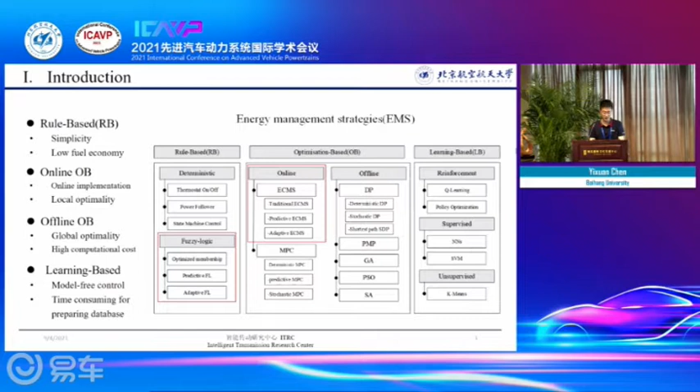EMS can be divided into 3 categories according to the method of algorithm implementation, such as the rule-based EMS, optimization-based EMS, and learning-based EMS. Each EMS has advantages and disadvantages. Considering the real-time requirements of the vehicle controller, the research of this paper is based on fuzzy control and ECMS.

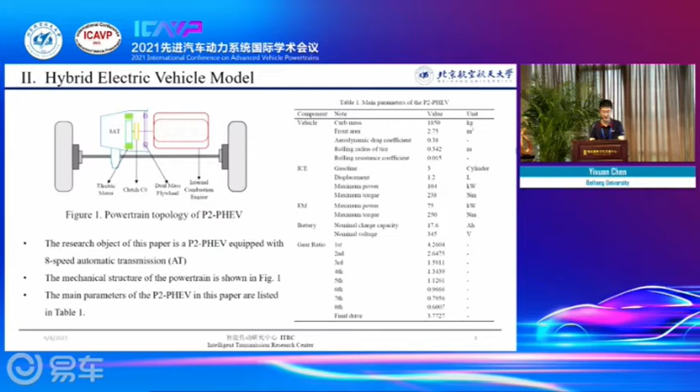Secondly, I will introduce the hybrid electric vehicle model. The research object of this paper is a P2 PHEV equipped with 8-speed automatic transmission. The main parameters of the vehicle in this paper are listed in Table 1, and the mechanical structure of the powertrain is shown in Figure 1.

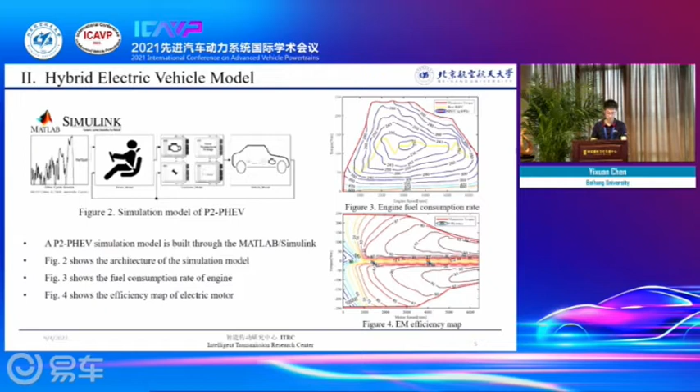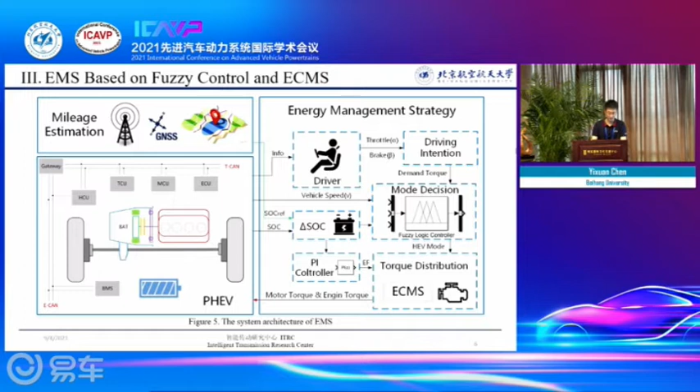Before the torque distribution between engine and electric motor, determining whether the engine needs to be started is necessary, usually by making a series of rules. However, the rule-based working mode decision method requires lots of calibration work, and it tends to cause the frequent stop of the engine. In this context, the fuzzy control-based working mode decision method is proposed to solve this problem.

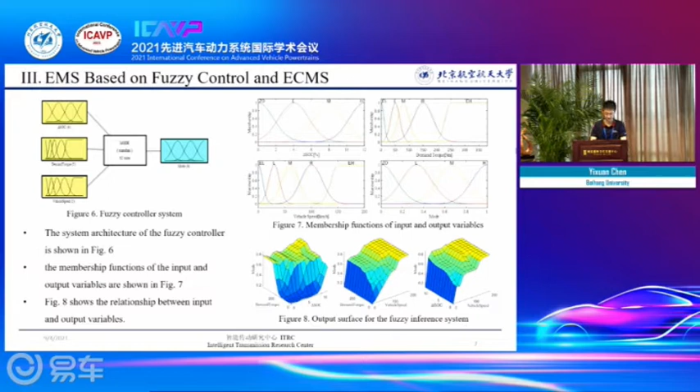Firstly, if delta SOC is low, then enter the EV mode. If delta SOC is high, then enter the HEV mode. Secondly, if the demand torque is low, then enter the EV mode. And if the demand torque is high, enter the HEV mode. Thirdly, if the vehicle speed is low, then enter the EV mode. And if the vehicle speed is high, then enter the HEV mode.

Rule-based EMS are usually unable to reasonably allocate the energy of the battery to the entire journey. For example, in charge depleting and charge sustaining strategy, the energy of the battery is first consumed to a certain limit, and then the engine is started to maintain the SOC. Once the vehicle enters the CS state, the engine is started to maintain the SOC under any driving conditions. So, ensuring the engine runs in a high efficiency area is difficult.

Therefore, to solve this problem, a mileage-based SOC reference curve is proposed, which is provided by Internet information, GNSS, and navigation map. The SOC reference curve can distribute the energy of the battery evenly among the whole journey. That is, the battery SOC drops to the lower limit at the end of a journey. If you continue to drive after the SOC drops to the lower limit, you will enter CS mode to maintain the SOC and protect the battery life.

When the mode decided is HEV mode, the torque distribution between engine and electric motor is the key to affect the fuel economy of the vehicle. To solve this problem, an adaptive ECMS is proposed. ECMS is an online instantaneous optimization EMS, which is derived from PMP.

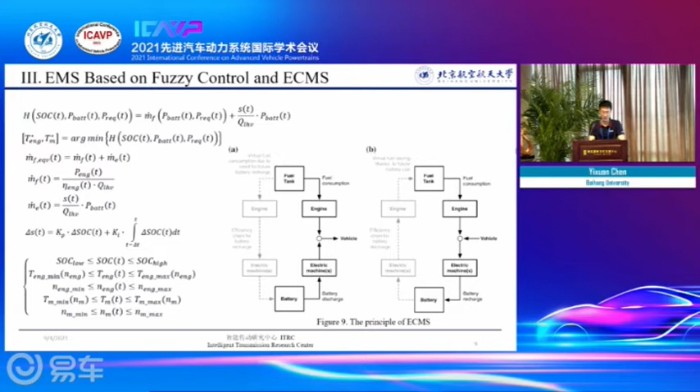The main idea of ECMS is to convert the instantaneous electric energy consumption at the current moment into fuel consumption, and then add it to the real fuel consumption of the engine to get an equivalent fuel consumption. The control variable that minimizes the equivalent fuel consumption at the current time is called the instantaneous optimal solution. The ECMS can realize the optimal control at every instantaneous moment, achieving the effect of approximate global optimal control.

And based on the simulation model, the simulation is carried out to verify and evaluate the effectiveness of the ECMS proposed. The battery capacity of PHEV is several times larger than that of HEV, so depleting the battery in a single WLTC driving cycle is difficult. To ensure the accuracy of the simulation result, 4 WLTC driving cycles with a total mileage of about 93 kilometers are spliced together for simulation.

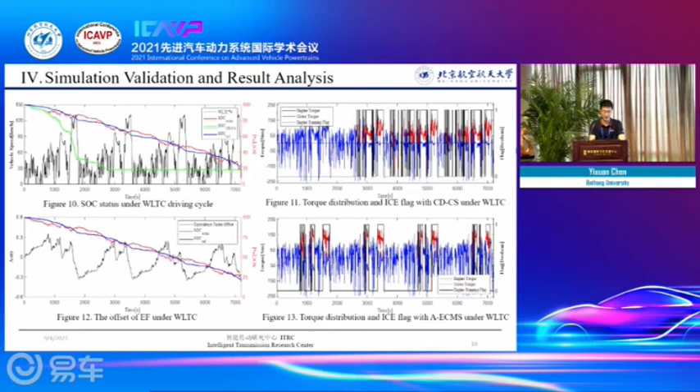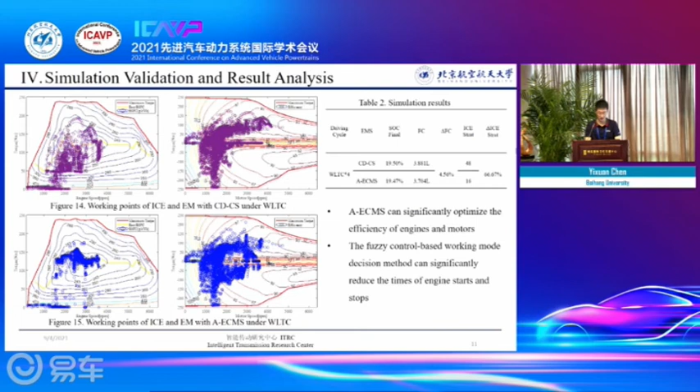Finally, this research reached 4 conclusions. Firstly, the working mode decision method based on fuzzy control can better analyze the driver's intention and effectively reduce the times of engine start and stop. Secondly, the torque distribution strategy based on ECMS makes the engine and motor work in a higher efficiency range. Thirdly, the uniform distribution of battery energy throughout the journey is more fuel efficient than CD-CS. Finally, the adaptive equivalent factor can help better track the SOC reference curve.